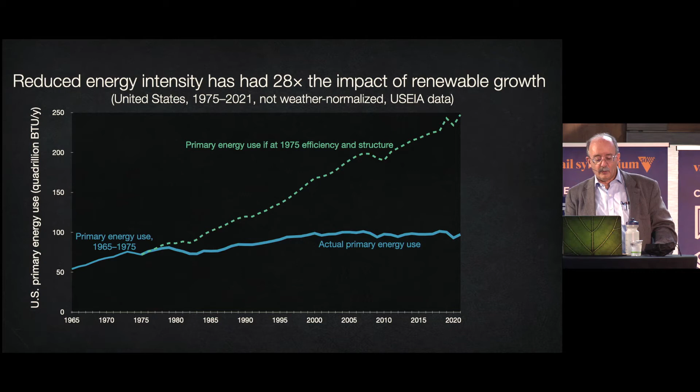If the United States total energy use had kept growing in lockstep with the economy since 1975, Americans would have used this much energy. Instead, we cut that use so far by 61%, with a huge cumulative saving. And meanwhile, the renewable energy output doubled, but with 28 times less cumulative impact than the savings.

Renewables, though, get virtually all the headlines because they're visible, but energy is invisible, and the energy you don't use is almost unimaginable. And yet, in a recent period, 2014 to 16, the world's saved energy avoided 3 times as much CO2 emissions as all the renewable and nuclear growth did.

Saved energy in the last 20 years has delivered half the world's decarbonization. It's officially able to deliver 40 to 70% of future decarbonization. I think all those numbers are quite conservative, but how odd we rarely hear about efficient use. The whole conversation's about supply.

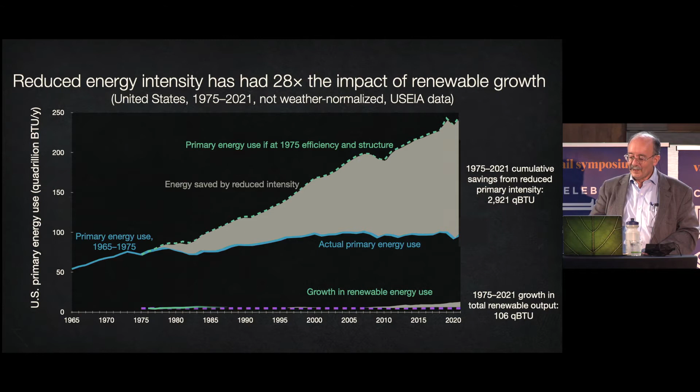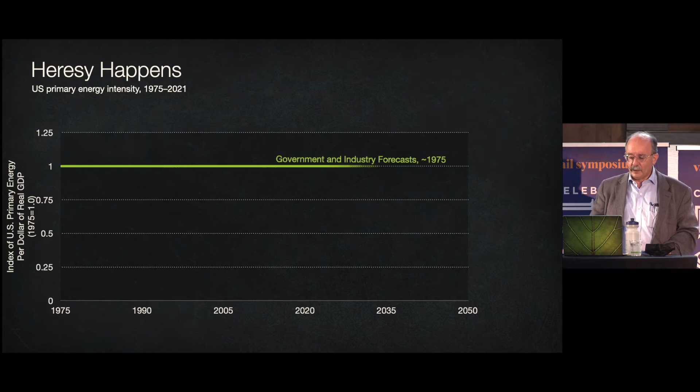Another bit of history. Around 1975, our government and industry all said that the energy needed to make $1 of GDP could never go down. A year later, I heretically suggested it could go down 72% in the next 50 years. So far, it's dropped 61% in 46 years, but just the innovations already added by 2010 can save another threefold, twice what I originally thought, and at one-third the real cost.

Today, even that heresy looks conservative because optimizing buildings, vehicles, equipment, and factories as whole systems, not as piles of little parts, can often make very big energy savings cost less than small or no savings, turning diminishing returns into increasing returns, as I'll describe next. And vigorously applied, this could roughly quintuple global energy productivity over the coming decades.

This peer-reviewed paper explains why making energy savings several-fold bigger can actually cost less, because it uses not more but fewer devices, and not fancier but simpler devices, more artfully chosen, combined, timed, and sequenced. We're used to resources like copper ore bodies or oil reservoirs, finite and depletable assemblages of atoms. But energy efficiency resources are different. They're infinitely expandable assemblages of ideas, depleting only stupidity, a very abundant resource.

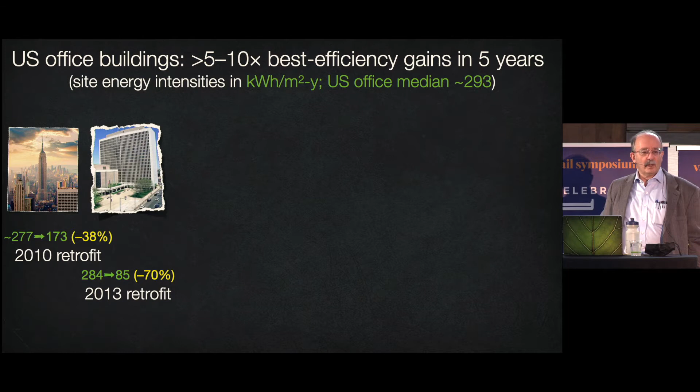This kind of integrative design let our Empire State Building retrofit save 38% of its energy, later 43%, with a 3-year payback. 3 years later, though, our cost-effective retrofit of the Byron Rogers Federal Center in Denver saved 70% and made that half-century-old government complex more efficient than what was then the best new U.S. office.

at NREL in Golden, which in turn is only a third as efficient as RMI's net positive, no mechanicals, passive office in Basalt. And then there's a Bavarian building reportedly using 2/5 less energy still. And yet all these technologies existed upwards of 2 decades ago.

What mainly improved is not so much technology as design, how you choose and combine technology.

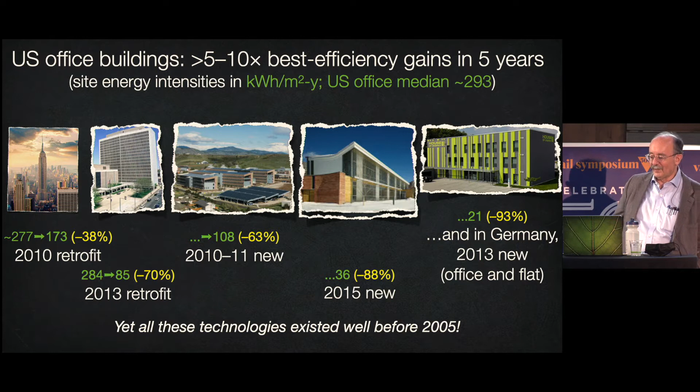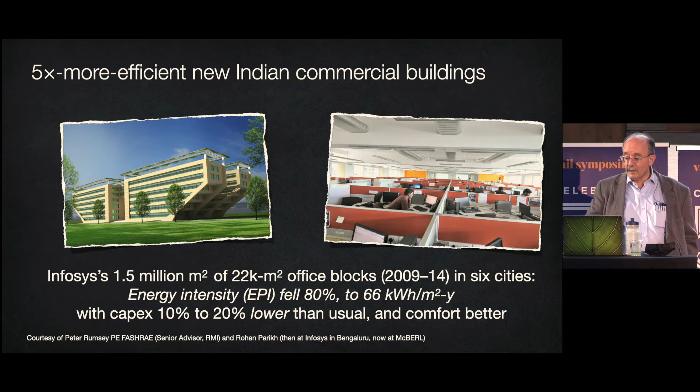In Europe, industrializing mass retrofits of housing and bigger buildings to net zero energy, that is, producing each year at least as much as they use, and streamlining their finance and soft costs, is now getting cheap enough to finance entirely from saved energy while extending building life and improving amenity and health and value.

This whole retrofit from before to after with a six unit row house bolts on a factory customized tea cozy around your house, and it's even been demonstrated to be installable in a single day while you're off at work. And now it's being tested in the US.

Similar methods are expected, for example, to cut energy costs 80% and emissions to zero in 9 old ordinary Brooklyn apartment buildings, also taking them completely off gas, making them all electric. And this is being done without disturbing the occupants as an archetype for citywide deep retrofits.

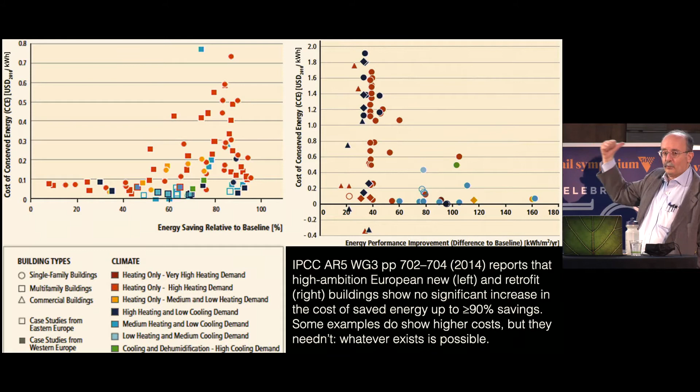Decade-old data reported 8 years ago by the Intergovernmental Panel on Climate Change shows that the best European new buildings on the left and retrofits of old buildings on the right, with bigger savings toward the right in both graphs, could save up to at least 90% of the energy use without costing more per unit of saved energy.

So even such huge savings in diverse new and old buildings can be very cheap. Those are the points that are almost down on the horizontal axis.

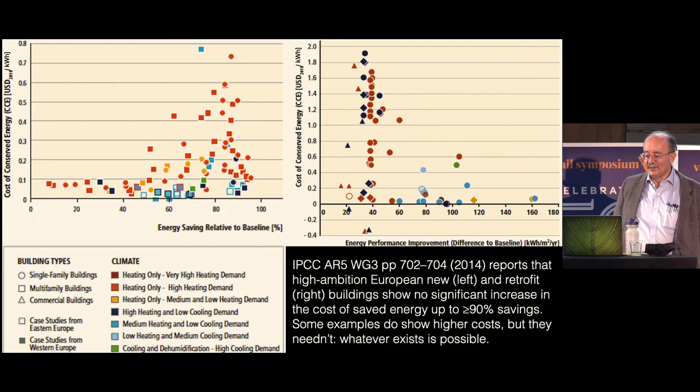And the big vertical scatter to some of the other points just shows the business opportunity to conform inferior projects to best practices, because whatever exists is possible.

As the earth warms and incomes rise, new urban air conditioners could overwhelm power grids and capital budgets, so RMI and Mission Innovation and the Government of India a few years ago launched the Global Cooling Prize, and its results were announced last year. It at least quintupled the efficiency of the best affordable window air conditioners. The two firms that won, one Indian, one Chinese, have a path to market because their combined market share is already 1/4.

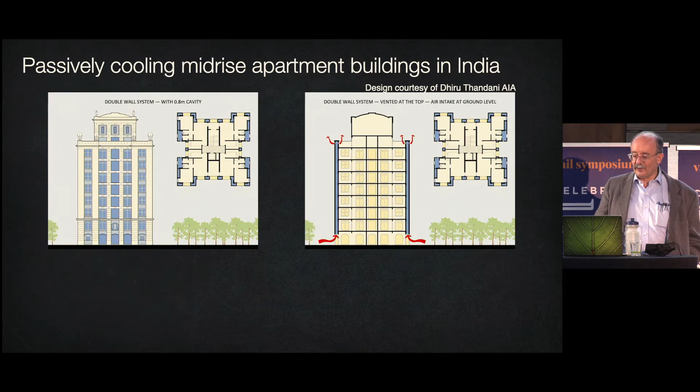But there's already an even simpler way worldwide, namely good design can first displace refrigerative cooling, like air conditioners. So, for example, these mid-rise apartments that proved popular in the Indian monsoon use passive, convectively vented double walls and super efficient ceiling fans to keep you feeling 29 to 34 Fahrenheit degrees cooler at just 2% higher construction cost. And with a few further refinements, they could deliver decent comfort with no air conditioning.

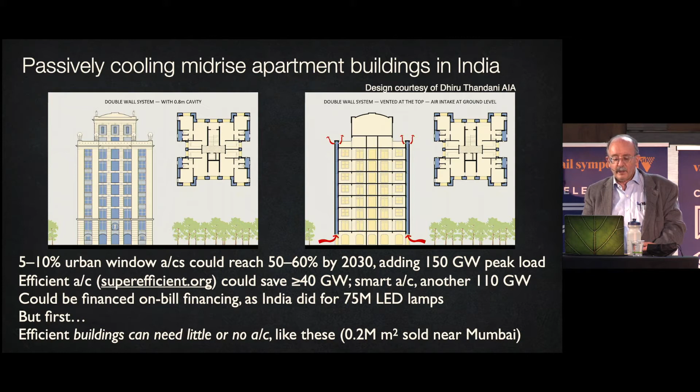Proven techniques can also profitably at least triple, probably quintuple, the energy efficiency of big commercial buildings' conventional cooling systems. But those mechanical systems may just have become obsolete thanks to another radical development.

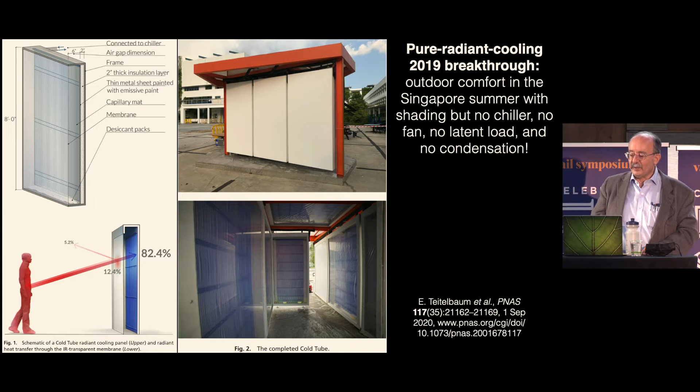It's a revolutionary experiment done 3 years ago by some Princeton folks, showing that purely radiative cooling kept people comfortable outdoors in sweltering Singapore, although in the shade, without moving, drying, or cooling the air. Instead, in a shaded but open-ended pavilion, kind of like a bus stop shelter, this experiment cooled people just by absorbing far infrared rays from their bodies into vertical panels on at least one side of them, cooled by capillary tubes circulating slightly cooled water and shielded from the humid air by a thin plastic film that's transparent to 82% of the infrared that your body radiates.

As the extended chart shows, even at 80% relative humidity, radiant temperatures around 73 to 77 F in the water you circulate can deliver comfort in air up to at least 90 F, 32 C. And that mild cooling you need can often be done passively with no electricity by special surfaces that passively radiate infrared into the sky, even in cloudy or rainy weather, and therefore feel cool to the touch when they're in midday sun. The same approach can even give us hot cars with cool bodies inside and no air conditioning.

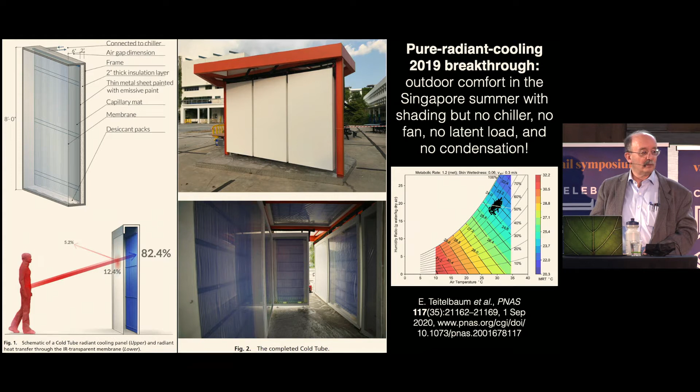That's a big deal. Most people assume that air conditioning is going to eat the grid. Well, it might not need electricity, and this can probably be retrofitted.

What about home appliances? Here's a Swiss fist-sized heat pump that can deliver 6 to 15 units of hot water per unit of electricity. Here's a dramatically more efficient, safe, and superior Swiss electric cooking system using vacuum-insulated pots to cook with 2 to 4½ times less electricity than induction cooktops, supposedly the best thing. So both these offerings are several-fold more efficient than those on the U.S. market.

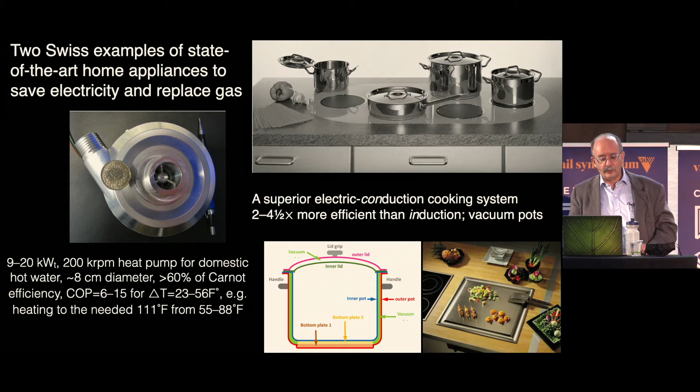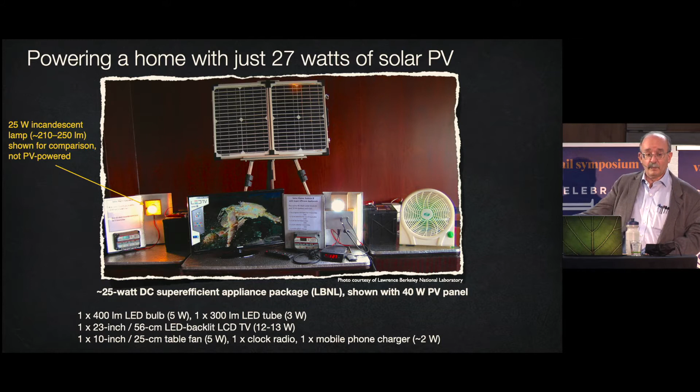More broadly, if you invest in things to save electricity instead of supplying more, or more precisely, if you invest to make things that save electricity rather than supplying more, you need about 1,000 times less capital, and you get it back 10 times faster. So you need on the order of 10,000 times less capital for the most capital-intensive sector, the power sector, which devours about a quarter of global development capital. Freeing up that capital to fund other development needs is the biggest macroeconomic lever we know for fair global development.

What about industry, which uses half the world's energy and electricity? Well, RMI's latest $60-odd billion worth of industrial redesigns typically found about 30 to 60% energy savings on retrofit, fixing up old factories, paying for itself in a few years, and far outperforming the orange zone in the upper left, where most energy service companies deliver disintegrated design.

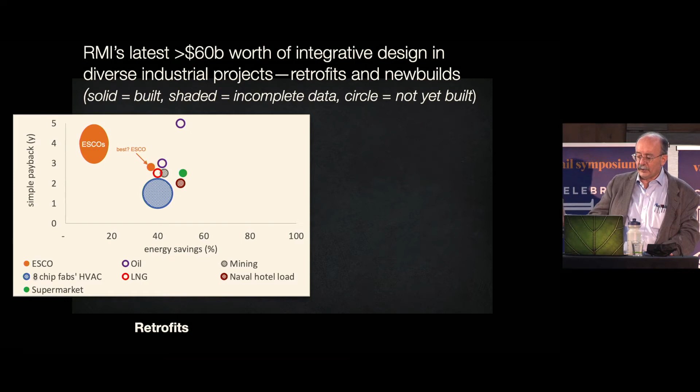In new projects, again across a range of industries, integrative design generally yielded about 40 to 90-odd% energy savings with less than normal capital cost.

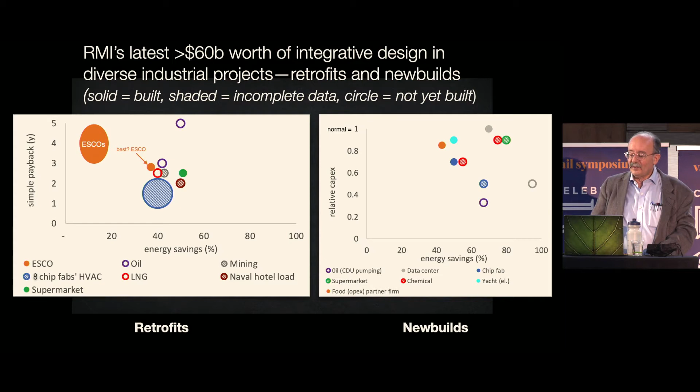To do these things, we just rethought process design and found big savings in traditional but often poorly designed auxiliary systems. Thus, most electricity runs motors. Half the motor power runs pumps and fans. But just better pipe and duct design can save 80 to 90+% of the friction, 97% in my house, and therefore a similar fraction of the pump and fan power.

If everybody did this around the world, it could save about a fifth of global electricity, or half the coal-fired electricity, with paybacks typically less than a year in retrofit and instant in new construction. But this isn't yet in any standard engineering textbook, government study, industry forecast, or climate model. Why not? Because it's not a technology, it's a design method. And most people don't yet think of design as a way to scale rapid change.

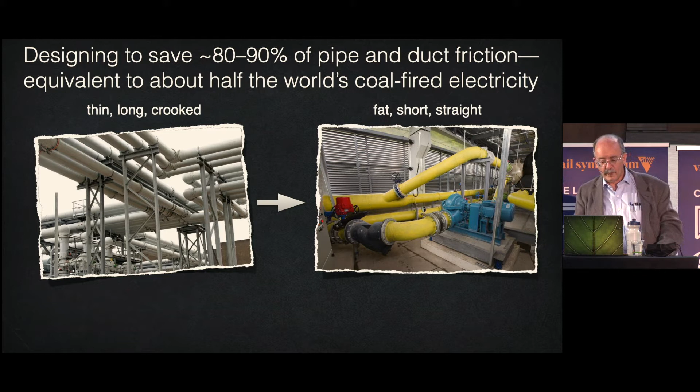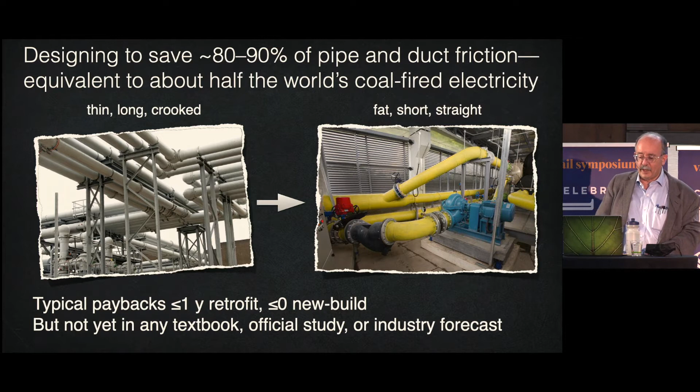To wring out friction, we simply use big pipes and small pumps, not small pipes and big pumps. Also, by the way, we raised up the pump to meet the pipe instead of dipping the pipe down to the floor to meet the pump. And then to eliminate any remaining elbows and their friction, we lay out the pipes first, then the equipment, laying out the supply pipes as if they were drains. We bend minds, not pipes.

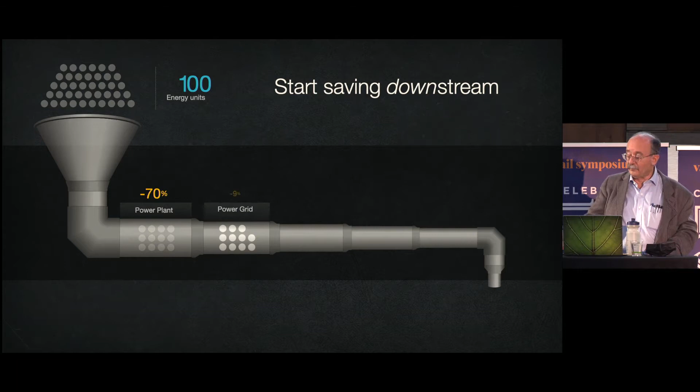What does such savings mean for the 3/5 of global electricity used in motors to run pumps and fans? In a typical pumping system, from the fuel burned at the power plant to the end use, many successive losses compound, so only 1/10 of the fuel energy comes out the pipe as flow.

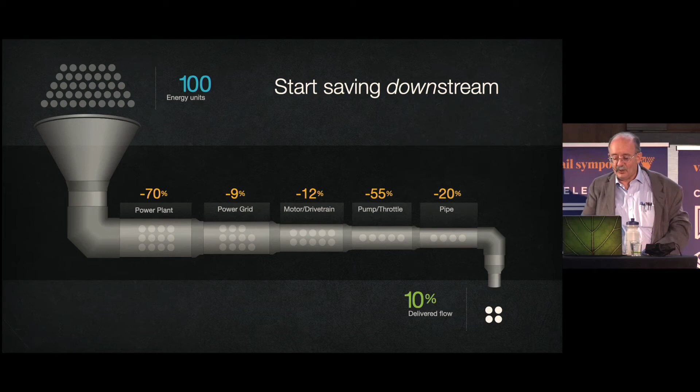But if you turn those compounding losses around backwards, they turn into compounding savings, and every unit of flow or friction you save in the pipe saves 10 units of fuel cost, emissions, and what Hunter Lovins calls global weirding back at the power plant.

And as you go back upstream, the components get smaller and cheaper, so total capital cost goes down. We could make motor systems 80 or 90-odd percent smaller and at least twice as efficient by a whole system retrofit that doesn't just use the usual 2 improvements, but rather 35, of which 28 turn out to be free byproducts of the first 7. So you can save several-fold more energy at about a fifth the unit cost.

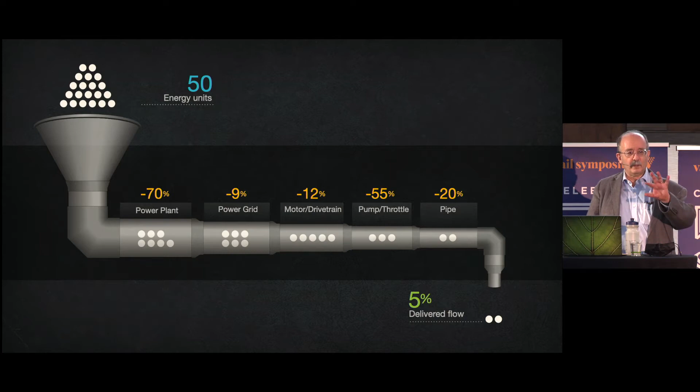So if you combine the pump and fan system savings and the motor system savings, your savings not currently being counted are good for about a third of the world's electricity.

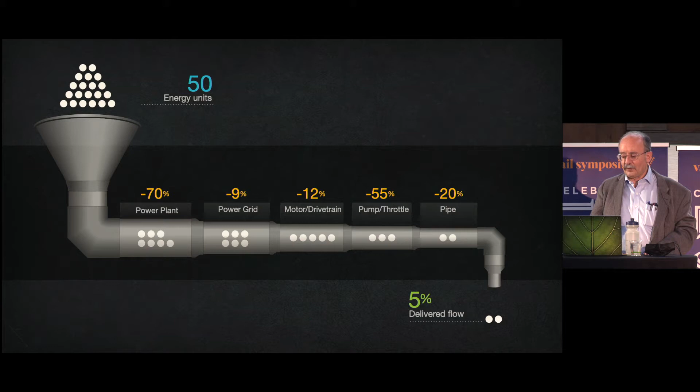We can also save industrial energy by saving the energy-intensive materials that industry makes. In a couple of papers a year ago, I compiled convincing but scattered literature on how just smarter structural design can profitably save at least half of the world's cement and steel that now release about 15% of global CO2. For example, substituting tension for compression structures typically looks better, costs less, and uses about 1/8 the tons.

Pouring concrete not into straight prismatic forms, but into curvy fabric forms can often save over half the concrete by putting strength and stiffness only where you need them. And those weight savings compound because you need less strength to hold up less weight.

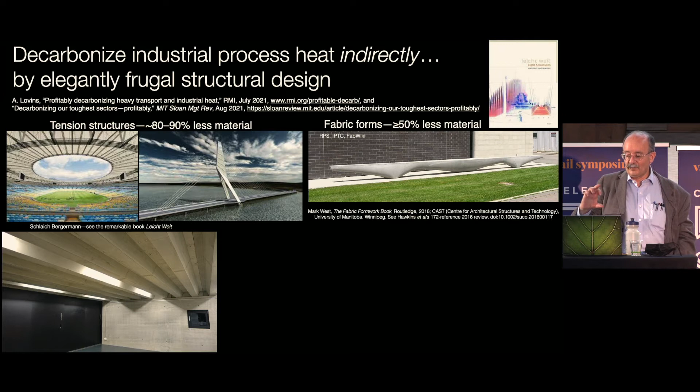I've become interested in floor slabs, not something I had previously paid much attention to. You just walk on them and don't think about them, but it turns out that if you fold it like corrugated cardboard, a 5 centimeter thick concrete floor slab or a shallow vaulted dome replaces a 30 centimeter thick flat slab. It costs less and saves 3/4 of the materials.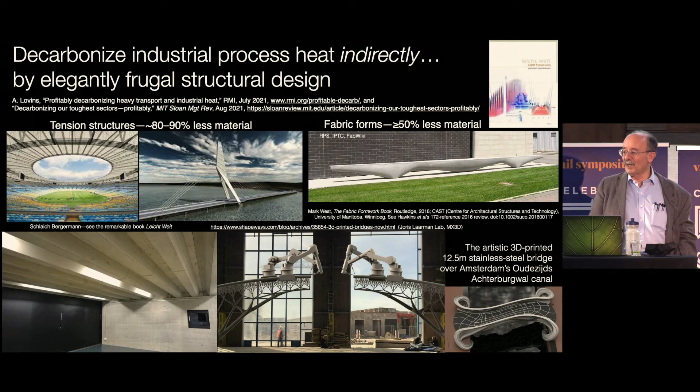Once you are using thin floor slabs, you can save another 15% of the core structural materials and 3/4 of the energy in a new mid or high-rise building, while increasing net rentable space by a stunning 55%.

Anyone here in property development? Anyone in the real estate business? 55% net rentable space does wonders for your pro formas.

As in the Singapore building done in 2015, 7 years ago, cost and complexity and building time all fall dramatically. So everything gets better. Why would you ever want to build the old way? And remember, the floor slabs are around half the weight of a typical mid or high-rise building.

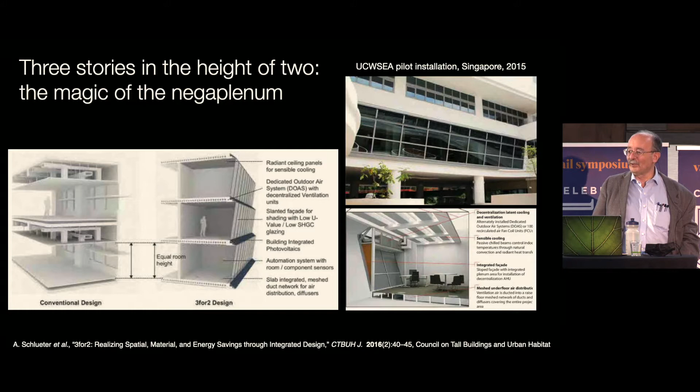Okay, even without integrative design and without those material savings, U.S. electricity use could shrink 25% by 2050, even if every car is electric and GDP is 2.6-fold what it was in 2010. And this quadrupled electric efficiency would save electricity at an average cost 1/10 what we pay to buy electricity today. So in this analysis, we're not buying nearly enough efficiency.

So this could save most of the time and money and hassle needed to install largely or wholly renewable electricity and a lot of those new power lines you keep hearing about. So the well-publicized challenges of vast renewable installations are largely artifacts of exaggerated demand caused by not competing or comparing efficiency with supply.

So the well-known Princeton study of how hard it'll be to build all this stuff, especially power lines, assumes 2 to 4 times less efficiency than in our study, and we didn't buy nearly enough.

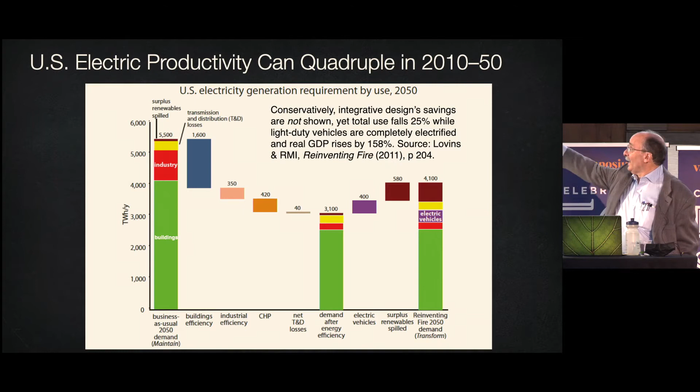Okay, autos. Integrative design can make our cars and light trucks several-fold more efficient even before we electrify them, and that makes their electrification faster and cheaper. You see, most of the energy you need to move a car is caused by its weight, and saving 1 unit of energy at the wheels leverages another 4 or 5 units of fuel saved in the tank.

So I drive a carbon fiber electric car by BMW that was profitable from the first unit they sold 9 years ago, and profitable for every one of the 250,000 units they made and sold since then. They just stopped in June.

Its carbon fiber was paid for by needing fewer batteries, the biggest cost item, to propel the lighter weight car. Also, fewer batteries recharge faster with less infrastructure investment and less energy. The saved weight snowballs spectacularly.

Assembling the car saves two-thirds of the normal capital and water and half the energy, space, and time. So the saved batteries and the simpler manufacturing paid for the supposedly unaffordable ultralight carbon fiber that made the whole thing 300 kilograms or so lighter. Also, the simpler manufacturing eliminated the two hardest steps in automaking, the body shop and paint shop.

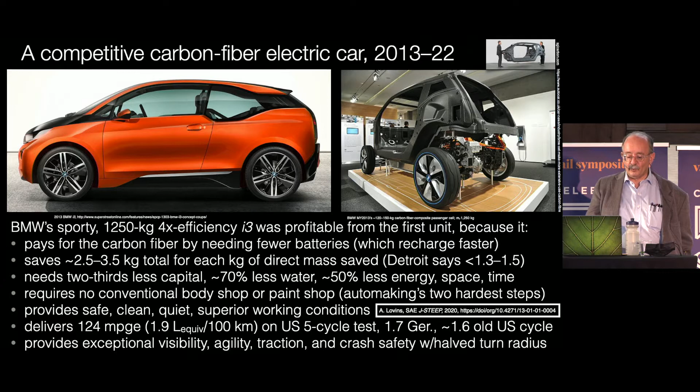And then there's five other layers of efficiency that multiply with car efficiency to manage the rest. Oh, that's not the end of the story. It's the beginning. The game's changing again. Consider a couple of hypercars planned to enter the market late this year, both from little firms I advise.

Most drivers will not need to recharge this two-seat electric three-wheeler because the 3 square meters of solar cells on top capture enough energy to drive about 40 to 60 kilometers a day. It's as if your present car, if you park it outside, miraculously added a couple of gallons of fuel every day to its tank.

So normally you don't need to charge it unless you need to go on a long road trip, but then you can quickly recharge the tiny batteries. You can see in the lower left how tiny they are in the base configuration. And if you want, you can get more batteries and have ranges up to 1,000 miles. And of course, you can also run routinely in places that have no electricity and no fuel.

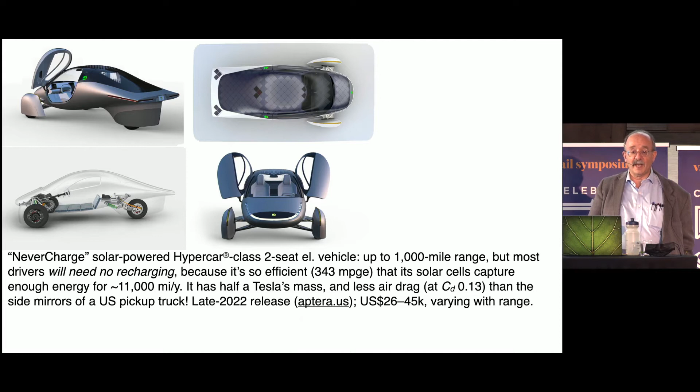Now, my BMW and Tesla electric cars are among the most efficient you can buy now, but this two-seater is nearly three times that efficient. It's equivalent to 343 miles a gallon, and the composite body looks very crash-worthy. One fun number on this: the total air drag of this vehicle is less than that of the side mirrors or the windshield wipers on an F-150 pickup truck.

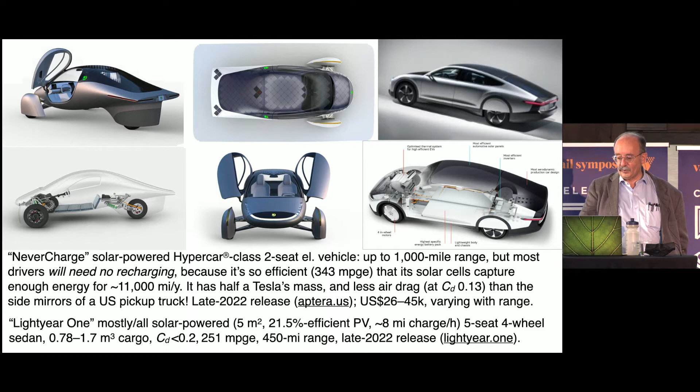Then there's the Dutch firm Lightyear with a five-seat four-wheeler, a real car, 450-mile range, light, aerodynamic, 5 square meters of solar cells on top, and it's only 251 miles per gallon equivalent, but it's got more solar, so it can add 8 miles of range for every hour in the sun. So the charging infrastructure that others have to pay for, these super efficient vehicles aim to bypass, and even they can be further improved. Then there's heavy vehicles.

You might wonder what's happened in the decades since we invented this stuff at the places I named. Well, what's happened is even bigger potential savings at even lower costs. So Tesla has a battery electric heavy truck that's being customer tested. They put off mass production till next year so the battery and car production can catch up, but it will more than triple efficiency with 40% sleeker aerodynamics, lightweighting that offsets the battery weight so it'll have normal payload, and a 2-year U.S. payback at the pre-war diesel prices.

Or, I was recently wandering around in this flight-tested air taxi, which could fly non-stop from Vail to London with one-sixth the operating cost and one-eighth the fuel of a standard business jet.

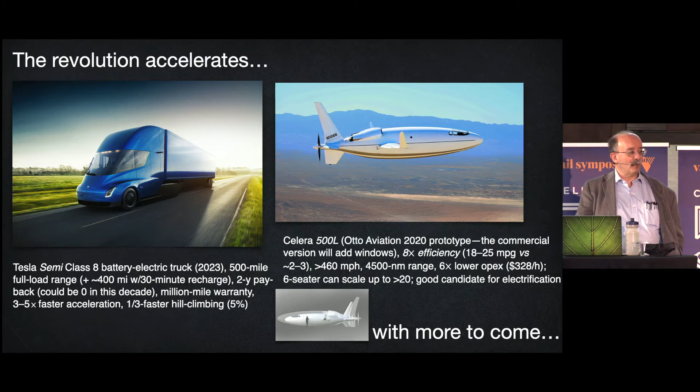And that plane too can improve. For example, 3 years ago, NASA tested a tough, damage-resistant lattice structure, 98.3% lighter than a typical metal aircraft wing. It has the strength of bulk elastomers, but the gossamer density of aerogel. And it doesn't have movable flight surfaces because every part of the entire shape passively adapts like a bird's wing to optimize continuously to the real-time flight conditions.

So you have thousands of these identical little molded plastic cells that can be assembled by swarms of programmed robots or grad students, whichever are cheaper, into an airplane of any shape you want with a tough polymer membrane over it. And that opens up revolutionary prospects for lightweighting and aerodynamics and cost reduction.

So there have been little prototypes, an airplane for Airbus, a car for Toyota. And you can even make this way a vacuum balloon needing no helium. That is, it's strong enough not to crush, but light enough that when you take all the air out, it's buoyant in the atmosphere. And a big one could lift 24 times the payload of a jumbo jet.

And by the way, you can improve the performance of these lattices about tenfold by making them out of carbon fiber, or 100-fold out of carbon nanotubes.

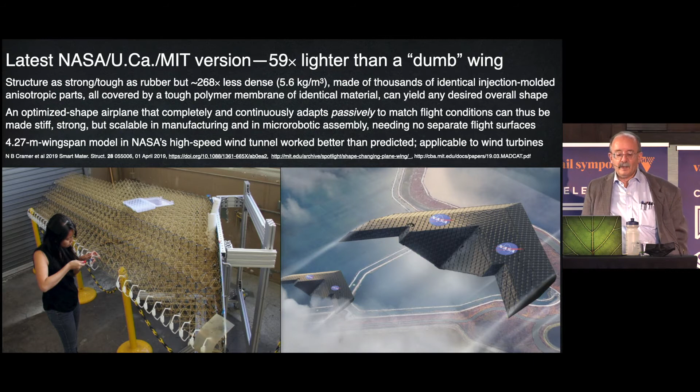Now, autos, meanwhile, are not just heading for 4 to 8-fold higher efficiency, they're also being driven less. A lot of young people don't even want to own one because it's cheaper and easier not to, now that smartphones bridge those once annoying route gaps by summoning ubiquitous transport services on demand.

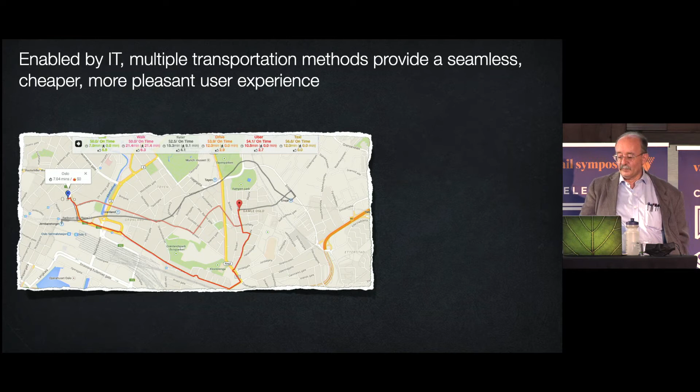And also, if you rent shared cars when you need them, you can boost their 5% asset utilization by about tenfold. And probably many of you also know there are peer-to-peer ways to rent out your car by the hour whenever you're not using it, and they handle the vetting and insurance and so on.

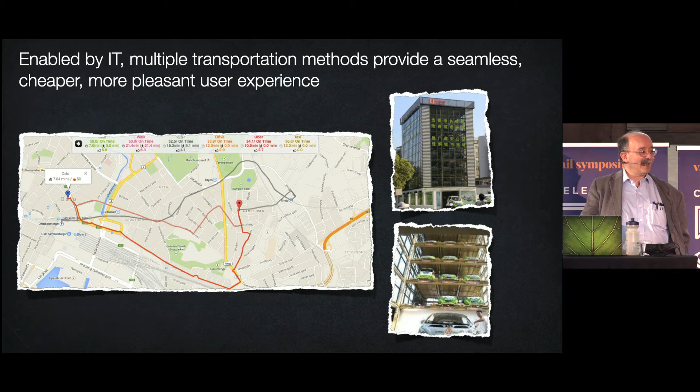Now, meanwhile, efficient and electric autos are morphing from pigs, that is, personal internal combustion gasoline steel-dominated vehicles, to SEALs, that is, shareable electric autonomous lightweight service vehicles. And those two changes in technology and 3 changes in business model are all simultaneous, they're mutually reinforcing, they're vigorously in play, and with RMI's help, they're sped by smart policies and intent commercial ambitions in India and China.

Now, meanwhile, the rules are changing. In 2010, almost half the world's new cars were sold in China, where only 5% of people owned one. And yet this 100-kilometer-long traffic jam took 12 days to unsnarl.

Building roads causes traffic, so politicians are changing the rules to ensure that drivers get what they pay for, but pay for what they get. And in fact, in Shanghai, a license plate costs more than the small car you put it on.

And smoggy Beijing will register your electric car instantly for free. But if you want a new fueled car, you have about a 1% chance in the lottery to be allowed to buy a registration. And a lot of European cities are actually phasing out cars in the central district.

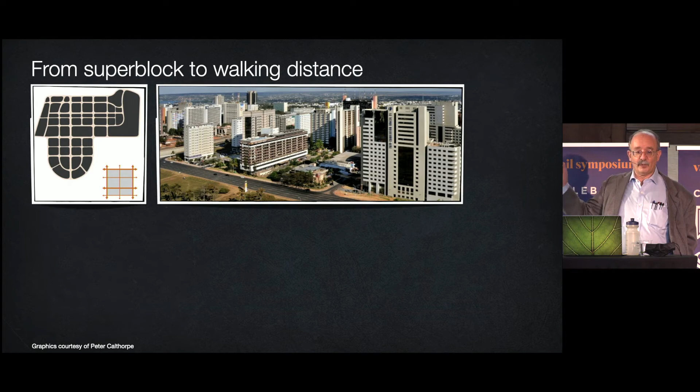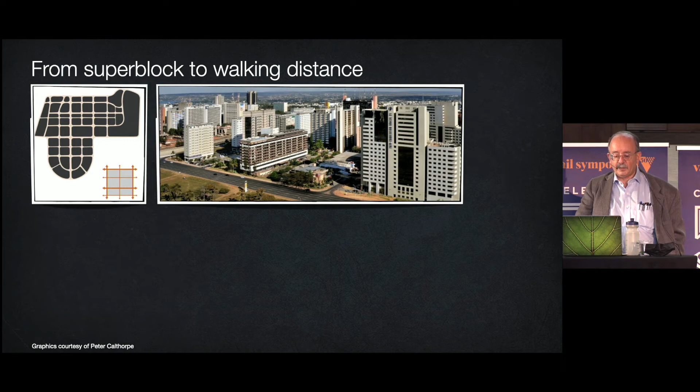So we've been designing cities around cars with an arterial vehicle network and these 14-lane boulevards you can't get across, chopping the city into chunks. But if instead you integrate and distribute where people live, work, shop, play, pray, it means people don't have to travel far nor by car. And then the city looks like a capillary web. It's designed around feet, not tires.

And that gives you two-thirds less driving and a third less concrete, and a lot more parks. It builds a human ecology with vibrant commerce, rich social life, equal or better throughput, cleaner air, and happier, healthier citizens. There are over 50 cities now doing this, and more to come, that will use little oil.

So the oil and gas reserves unsellable for competitive reasons are now looking bigger than the reserves unburnable for climate reasons. Oil owners are more at risk from market competition than from climate regulation. The cost of getting autos completely off oil has fallen from $18 per saved barrel a decade ago to under $7 today, heading below zero in the next few years. So oil became uncompetitive even at low prices before it became unavailable even at high prices.

So that's the quick oil story. There's another big energy story, electricity, which is similar, but it's moving faster. We're shifting from molecules and atoms to bits and packets, from hardware to software, from hierarchies to networks. Electricity is changing from centralized, supply-focused, fossil and uranium-fueled and brittle, to distributed, customer-focused, renewable, and resilient. It's starting to become decarbonized, decentralized, digitized, and democratized.

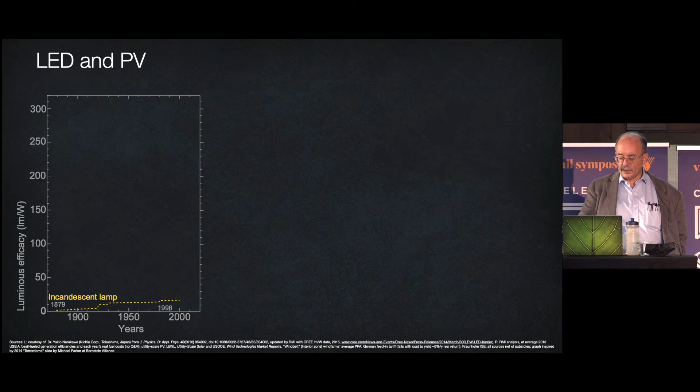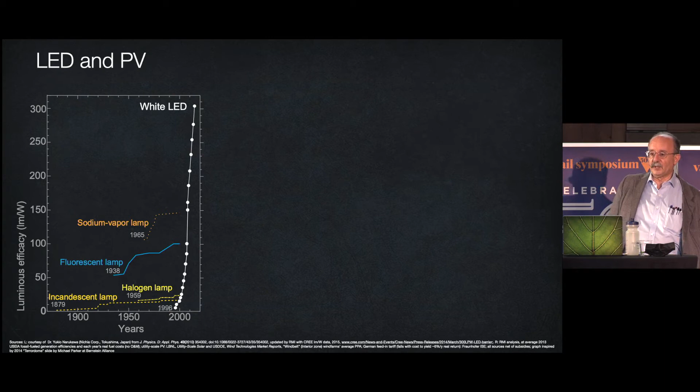And the competition is not just between different generators, it's also with an even cheaper rival: more efficient use. As with fuel, so with electricity. Technology and design are both moving efficiency into fast forward. So for example, prior lighting improvements were largely swept away as LED lights each decade got 30 times more efficient, 20 times brighter, 10 times cheaper. And ultimately, as we build them out, they'll save about an eighth of the world's electricity. We've already seen the dramatic savings you can get in most uses other than lighting.

I wonder what else changes this fast. Well, the rest of the energy transformation, that's modern renewables. Because LEDs backwards and inside out are PVs, photovoltaics. Instead of turning electricity into light, they turn light into electricity.

And PV and onshore wind power costs have plunged below the dashed lines. That's the cost of fossil fuels fed into our thermal power plants, often making our old coal, gas, and nuclear plants uneconomic just to run. So they're exiting the market whenever allowed to.

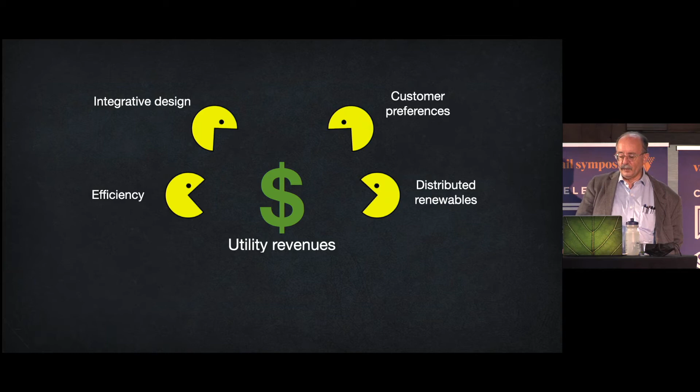Indeed, powerful disruptors are converging on the electricity industry from at least 4 directions. And these 4 Pac-Men of the apocalypse move fast. They don't just add, they exponentiate. They're not lone wolves, they hunt in packs. They multiply quickly, and they can gobble up half of utility revenues in this decade. Together, they're creating an alien competitive landscape faster than most utility cultures can cope.

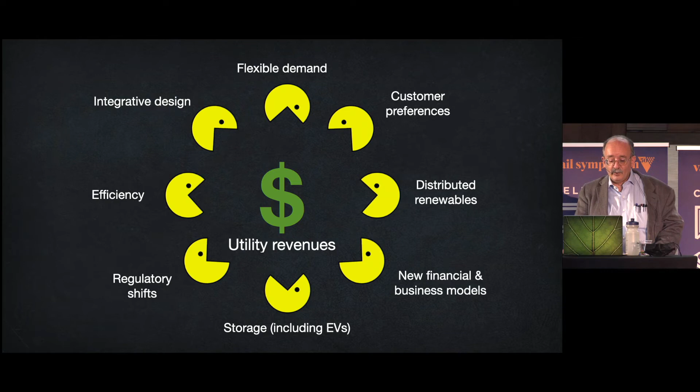Eight years ago, all central power plants were called dinosaurs, and the full quote is: 'Too big, too inflexible, not even relevant for backup power in the long run.' Who said that? It wasn't Greenpeace, it was Union Bank of Switzerland. And now 4 more Pac-Men are coming over the hill, a whole new wave of them.

Now the Paris Agreement's aspirational goal, now the core Glasgow goal, 1.5 degree warming, not more, would require closing a coal plant every day to 2040, practically all of them by 2050. And yet the new market prices of renewables now make this profitable without counting the value of avoiding climate change.

A couple of years ago, some of my colleagues and two other groups analyzed 95% of the coal plant fleet in the world and found that using efficiently structured financial instruments, you could close and replace all the coal plants immediately, in principle, with modern renewables, including battery storage, and it would be cost neutral in two years, that is by now, and by 2025 it would be saving over $100 billion a year. Some of the biggest benefits turn out to be in China and India, which build many of the world's cheapest renewables.

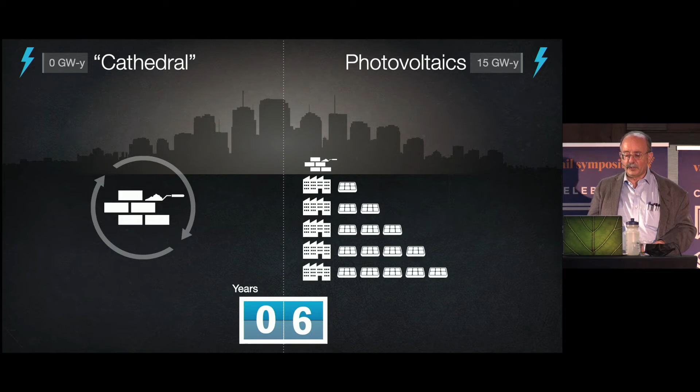Now, modern renewables also scale up in a fundamentally different way. We used to build big cathedral-like power plants costing billions, taking a decade to build. But now each year, similar investment can build you a factory that produces enough solar cells each year thereafter to generate as much electricity as your cathedral would ultimately do.

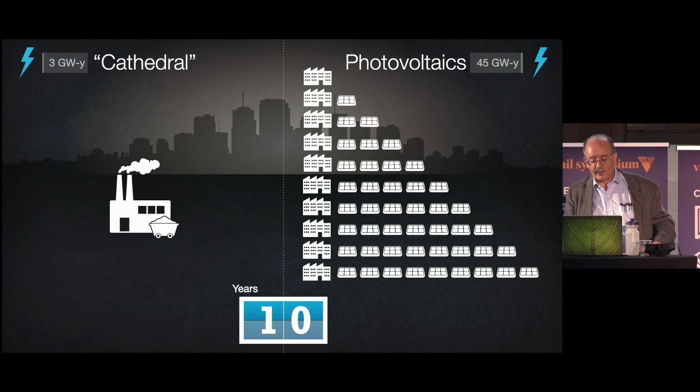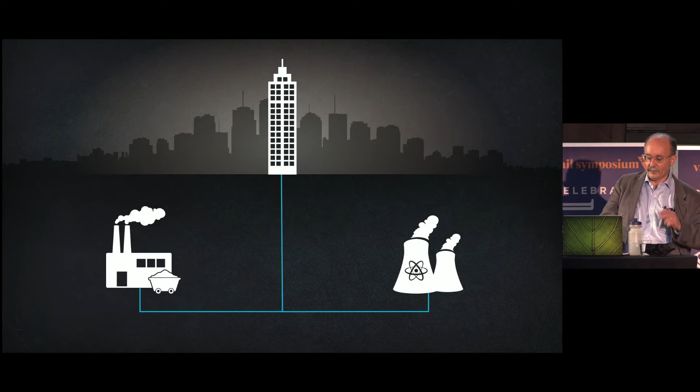So solar output worldwide is scaling faster than cell phones. You can see in this thought experiment, just in the first 10 years, you get 15 times more electricity from solar than from a traditional power plant. And yet we're still told that only coal, gas, and nuclear stations can keep the lights on because they're 24/7, while wind power and photovoltaics are variable and thus supposedly unreliable.

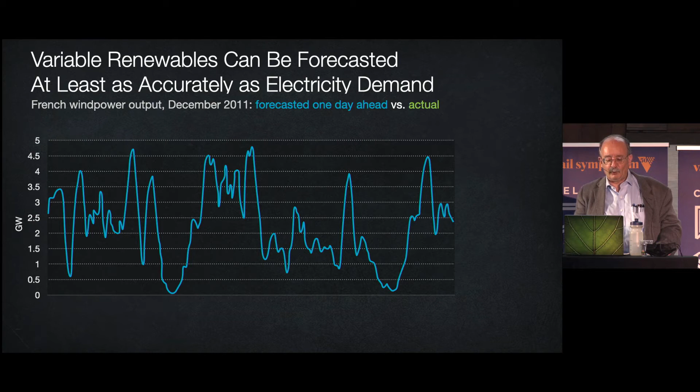But variable doesn't actually mean unpredictable. Here's how accurately the French grid operator, in a stormy winter month, forecast a day ahead the actual output of the country's wind farms. It would be nice if they could forecast demand that accurately. And a decade later, we're a lot better at it.

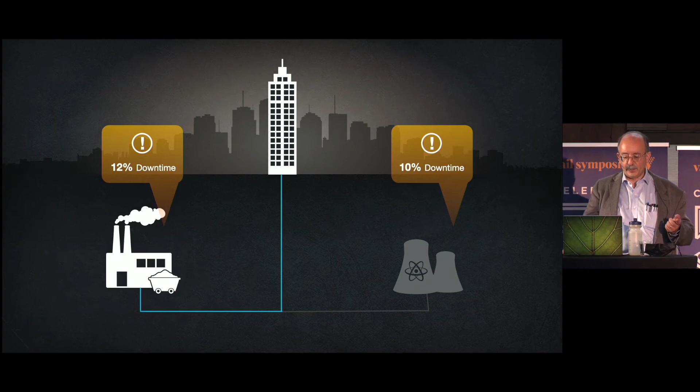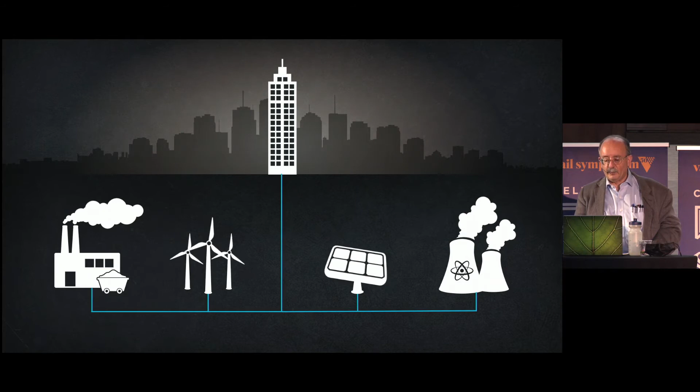And indeed, we built the grid because no generator is 24/7. They all break. And when a giant power plant fails, you lose 1 billion watts in milliseconds, often abruptly, and for weeks or months. So grids were built to manage this intermittence by backing up failed plants with working plants. In exactly the same way, but often at lower cost, grids can also manage the forecastable variations of solar and wind power by backing up those variable renewables with a portfolio of other renewables, all forecasted, integrated, and diversified by type and by location.

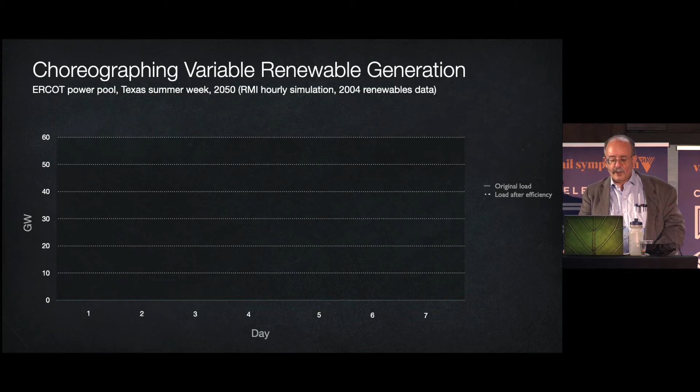So in Texas, whose grid has no big hydro dams and is 99% cut off from the rest of the country, a 2050 summer week of expected loads can get a lot smaller and less peaky with profitably efficient use. Then we can make 86% of the annual electricity with wind and solar cells.

You can see they're quite variable. And the last 14% from dispatchable renewables, the ones you can get whenever you want: small hydro, geothermal, solar thermal electric, burning municipal and industrial and agricultural wastes, burning obsolete energy studies, burning feedlot biogas. So now you've got 100% renewable supply, except it's not a good match to the dashed line, the load shape.

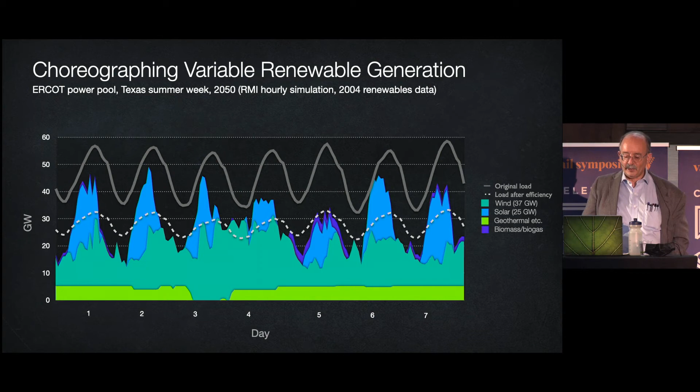So let's take the surplus electricity and put it into two kinds of distributed storage that are on the market and worth buying anyway, namely ice storage air conditioning and smart bidirectional charging of electric autos. Then we can get that distributed storage back when needed and fill the last gaps with unobtrusively flexible demand. And now you have 100% renewable power every hour of the year with no bulk storage, and with only about 5% left over to make hydrogen or ammonia to decarbonize other sectors like heavy transport and industrial heat.

So the economics should be excellent even at today's prices. Now the variable renewables, that is photovoltaics and wind, do require careful grid balancing on multiple timescales, just like other power plants, but with different details.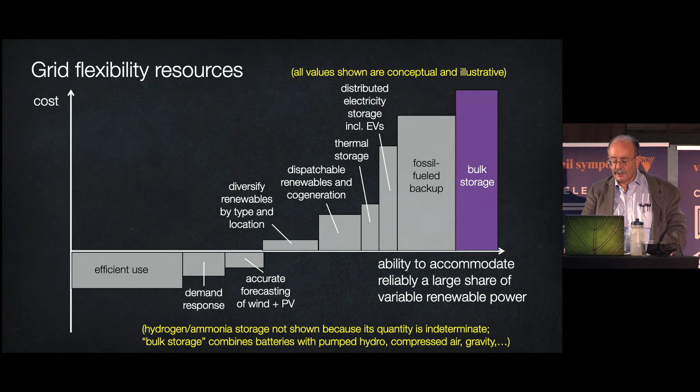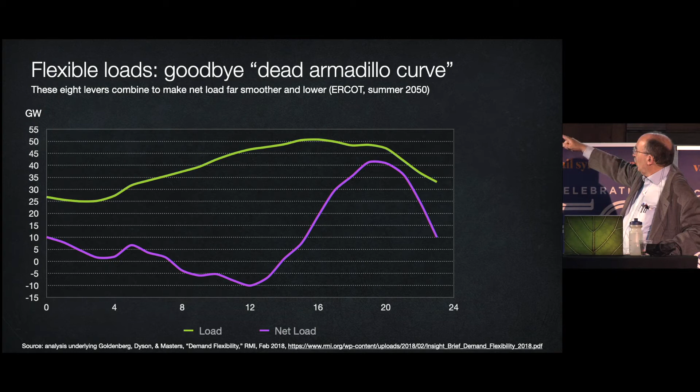For example, another little Texas simulation we did in summer 2050. If you take the load in green and then subtract the solar and probably some wind production, but maybe it's all solar, you get what's called the duck curve, where you have to crank up rapidly in the evening as people come home and turn stuff on just as the sun's going down.

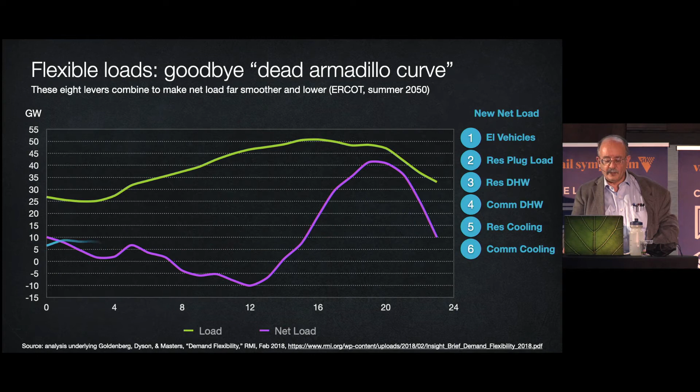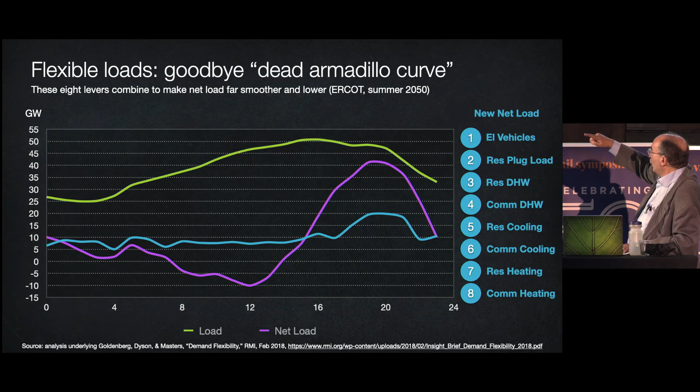But if instead you install 8 kinds of so-called demand response, which is convenient and unobtrusive to the customer, that duck curve goes away, the daily load range falls by half, you get rid of a quarter of the non-renewable capacity, the renewables get a third more valuable, and it pays back in about 5 months.

Some grid operators now do this kind of choreography every day. Germany, Britain, and Ireland are half renewably powered. Denmark's renewable percentage is probably well up in the 80s, and already these and some other European countries with modest or no hydropower are meeting about half to three-quarters or more of their annual electric needs from renewables. And yet they're adding no bulk storage, and they have superior reliability. Danish and German electricity are 5 times as reliable as ours.

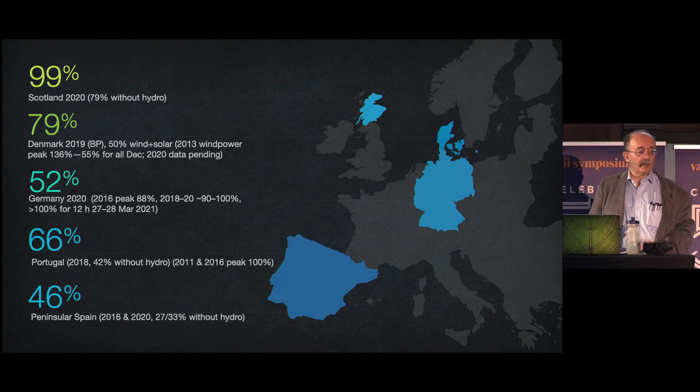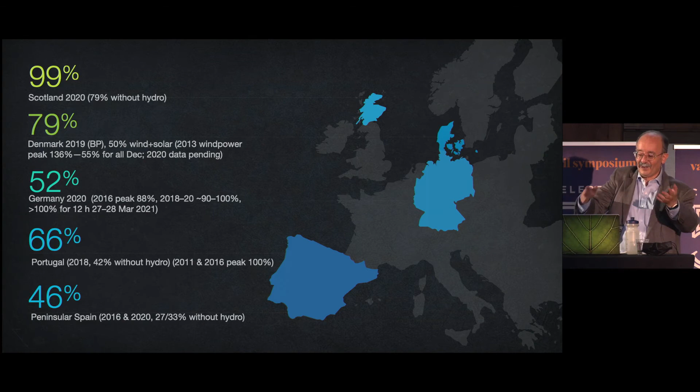The 99.999% reliable former East German utility, 50 Hertz, was 62% renewably powered last year. They're targeting 100% renewables, all reliably integrated, 10 years from now. So, as my colleague Clay Stranger puts it, the operators have learned to run these grids the way a conductor leads a symphony orchestra. No instrument plays all the time, but the ensemble continuously makes beautiful music.

And there's some remarkable speed showing up in some developing countries. At the end of 2018, coal-dependent Vietnam had 0.1 gigawatts of solar power. Two years later, 16.5 gigawatts, the most in East Asia. It's a third more than the 2025 target they'd set a few months earlier. It's enough to generate a fourth of the nation's electricity once the grid catches up. 9 of that 16 gigawatts they suddenly built was on 100,000 rooftops or similar structures, equivalent in output to building half the nation's coal plants in a year.

72% of those rooftop units were installed just in the month of December, mostly in the last week, just in time to get a juicy feed-in tariff, which had a 9-month window. Isn't that amazing? The grid will be several years catching up with it, and now there's a big boom starting in wind as well, where the World Bank says the offshore potential alone ranges up to 500 gigawatts. This revolution was almost all privately financed by independent producers under standard power purchase agreements. Policy is still in flux, internal battles continue, but now some neighbors like Indonesia, inspired by Vietnam's solar revolution, are accelerating their shifts from coal to renewables.

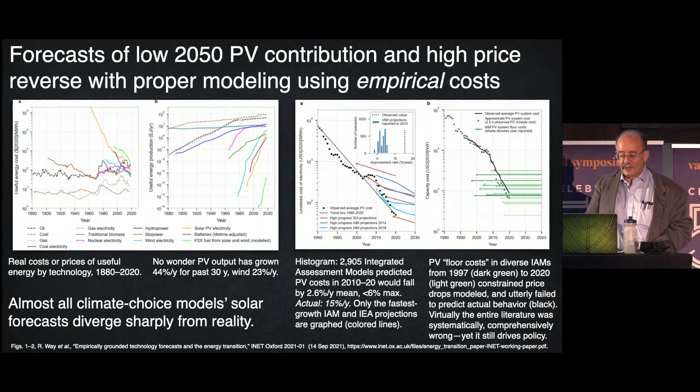What the Oxford analysts found very convincingly is that if you count actually observed market prices, not theoretical predictions, then the energy transition, getting off fossil fuel in as little as 2 decades, will reduce total cost. Doing it faster makes it cheaper. The trade-offs that dominate the climate economics literature are not real. Rapid transitions win at any realistic discount rate, and academic economists have spent decades debating trade-offs that don't exist.

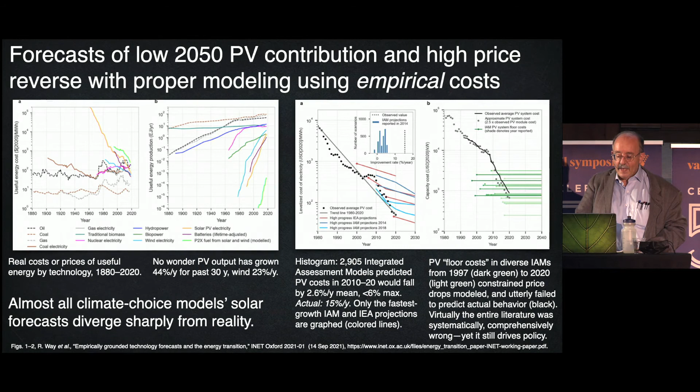Now, assembling such opportunities back in 2011, RMI's business and design book, Reinventing Fire, rigorously showed how to triple U.S. energy efficiency and quintuple renewables by 2050. So by then we would need no oil, no coal, no nuclear, at least a third less gas, while saving $5 trillion, assuming all the avoided impacts of burning stuff are worth zero, growing GDP 2.6-fold, strengthening national security, and cutting fossil carbon emissions by 82 to 86%.

And these best buys also turn out to be the most effective solutions to the big global problems that hazard every country's security and prosperity. And if you like any of Reinventing Fire's outcomes, you could support that transition without having to like every outcome and without having to agree about which outcome is most important. So I think focusing on outcomes, not motives, can turn gridlock and conflict into a unifying solution to our common energy challenge.

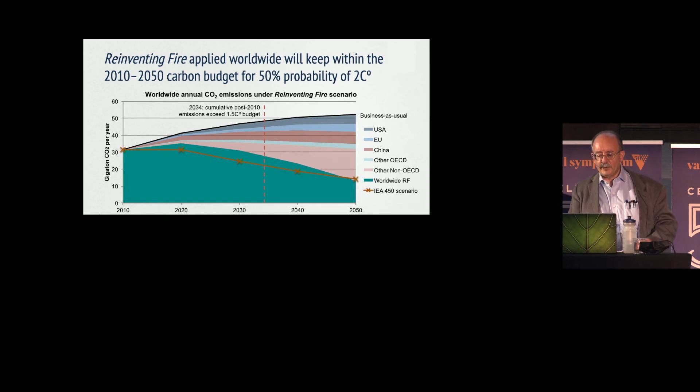Here's the bigger picture. Climate science models have conservatively understated the speed and the runaway potential of climate change. But climate policy models, or climate choice models, almost unnoticed, have conservatively understated what we can do to stop climate change. If you offset those two biases, what Jeremy Grantham calls the race of our lives is very much on, and despair and complacency are equally unwarranted.

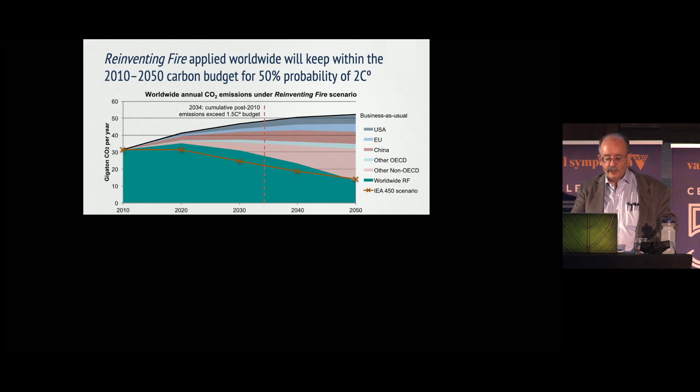The combined effects of efficiency and renewables in recent years' markets put us about on track for 2 degrees. We need to double the pace for 1.5 degrees. And to do that, we can now enlist a very powerful ally, and that's the dynamics of financial capital markets. You know, feeling the competitive threat, the incumbent energy suppliers are understandably focusing on the need for price to exceed cost. They're doing pretty well at that right now. But many seem to be forgetting the other part of the business condition, that value has to exceed price.

If competitors offer a superior value proposition and run off with your revenues, it doesn't matter if you can profitably sell what your former customers are no longer buying.

In 1900 in Manhattan, you had to look hard for the first car. 13 years later, you had to look harder for the last horse, because Ford's Model T got 62% cheaper in 13 years. Car-owning households soared from 8 to about 60% in a decade, 3/4 financed by a GM and DuPont innovation called car loans. Well, today our solar modules just got 80% cheaper in 5 years. 3/4 of our rooftop solar is innovatively financed. And Ford's and Edison's industries are merging to eat Rockefeller's industry.

So the pace of transformation is set not by incumbents but by insurgents. They're not inhibited by legacy assets or business models or cultures. It's worse than that, because investors flee before customers do. Capital markets keenly sniff out disruption. And once they think you're in or even headed for the toaster, they get that whiff of burnt toast. They don't wait for the toast to get done before they decapitalize you and invest in your successors.

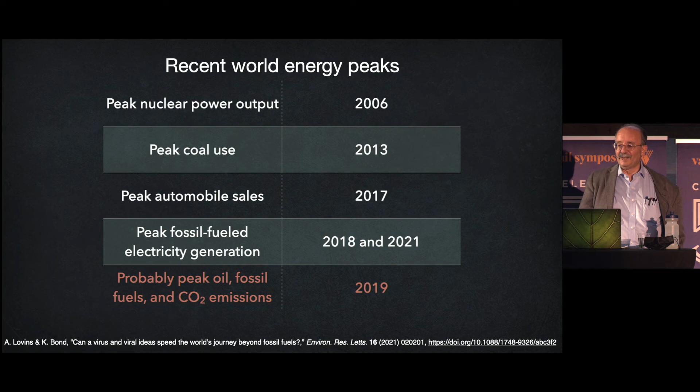And total energy use might still go up a little, but so far, it's still below 2019 levels, but wind and solar are supplying more than all the growth, turning coal, then oil, then gas into sunset industries.

And of course, efficiency and renewables reinforce each other. Efficient use makes renewables gain share faster. Efficiency outcompetes fossil fuels sooner. And BP's data book out a few weeks ago shows these trends continuing in 2021. And today's fossil fuel price spikes will, of course, reinforce them.

We're not going to buy lots more energy just because it's more expensive. Doesn't work that way. Today, we actually have what amounts to a global carbon tax, much bigger than most economists wanted to protect the climate. It's a lousy tax design. It's done the wrong way. It's going to the wrong place. It's causing a lot of hardship, but it will speed the journey beyond fossil fuels.

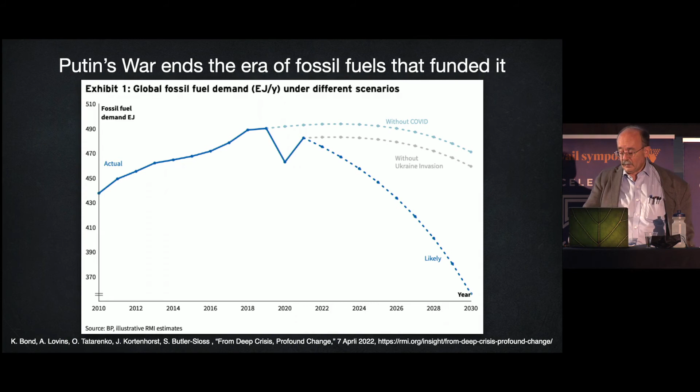And if we continue to grasp this unique opportunity, as Europe is doing with impressive focus and resolve, then Ukraine's agony will not have been in vain.

One last thought. This global energy transformation is not just fundamental, it is elemental. The first industrial revolution was the age of carbon. It built our prosperity and the world's mightiest industries from coal and oil and gas. But now that obsolete age of carbon is giving way to the modern age of silicon.

Silicon microchips and telecommunications and software turn people from isolated to networked, systems from dumb to smart, grids from analog to digital, and potentially from dirigiste to democratized. Silicon power electronics make electricity interconvertible and precisely applicable, replacing fiery molecules with obedient electrons. And silicon solar cells enable the ascent of energy from mining the fires of hell to harvesting the breath and radiance of heaven.

So our responsibility and opportunity is to help enable the new energy system, not protect the old one, to build back better, to move fast and fix things. So the global energy transformation can move at the pace and the cost of design and of software, not of infrastructure, and can be not constrained by the inertia of incumbents, but sped by the ambition of insurgents. I think I see a few insurgents here today.